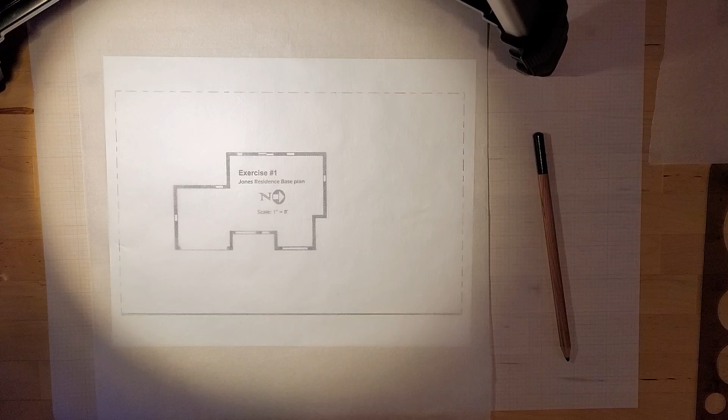I'm going to do a quick video for you about tools because tools can be somewhat confusing initially.

You should have gotten in your packet some 8 scale vellum. Each of the larger squares you see here equals 1 inch, and with this type of vellum, 1 inch equals 8 feet, hence the name 8 scale. That means each of the 8 little boxes inside the larger boxes equals 1 foot on your drawing, which makes it really easy when it comes to measuring.

Speaking about measuring, there are basically 2 kinds of scales. You got one kind in your packet called an engineering scale, and you can see it says engineering on it here. It is not the scale we're using—it's for larger projects, like a square mile kind of thing. So we're not going to be using that.

We're using an architect scale, and it says here on it, architect scale. You'll see in the pictures that we are primarily looking at 1/8 over here on the side, which means each little mark from 0 to the next mark is 1 foot on your drawing. If you lay it down here, you'll see it actually lines up with the little squares in your vellum. Don't be fooled by these larger numbers at the bottom.

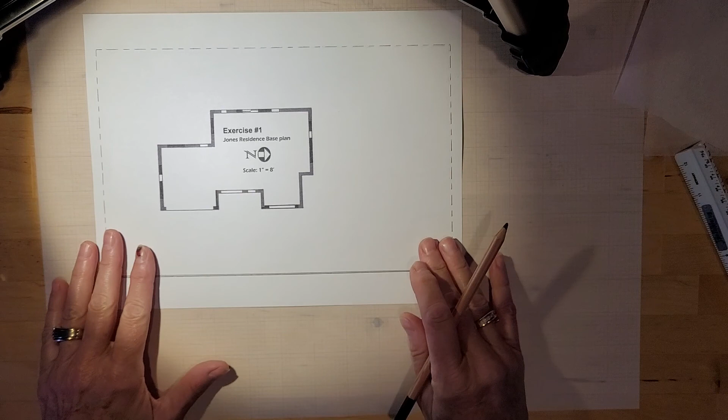Now, how do you use this vellum? I'm going to give you an example. This is the Jones base plan. You all have this—it's on the Google site and it was sent to you in an email.

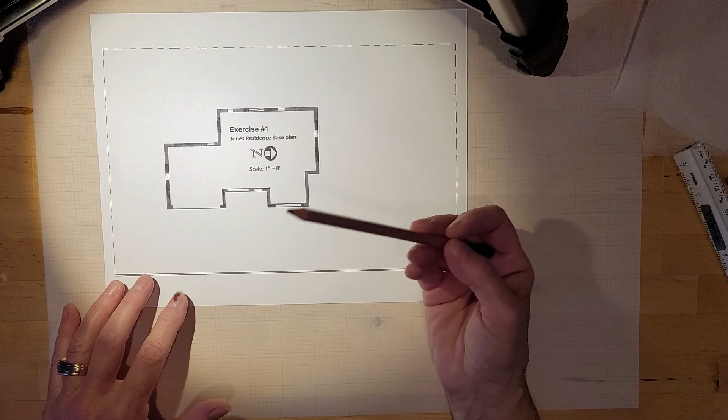You can see that this is the property line, dashed around the edge. This is the curb—the double line is the curb, so this is where the street is out in this area. This is a 1 to 8 scale. Now, this is roughly that—it depends on how it's printed, so it's going to be pretty close, but for our exercises it's going to work out just great. Here you can see the walls are thick, and these little openings are windows.

This is a sliding door, and you'll notice these correspond with the information in the pictures about this plan as well. This is the garage door, front door, front window, and we have a blank slate to work with for the class exercises.

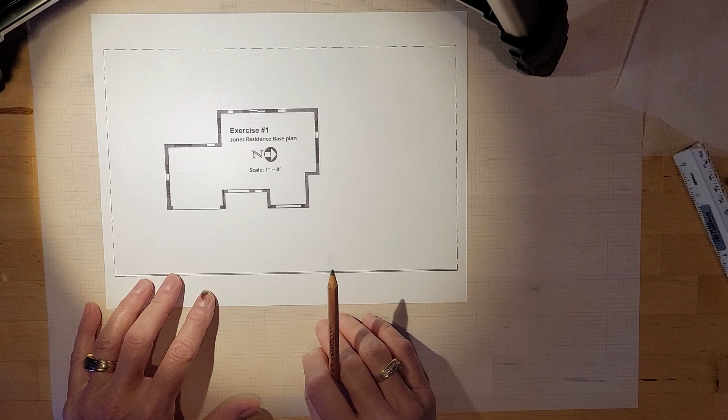Now, how do you do this? How do you use this? When we are going to do a bubble diagram, which is one of your assignments coming up, you can take a piece of tracing paper and lay it over this drawing. I like to usually mark the corners here to correspond.

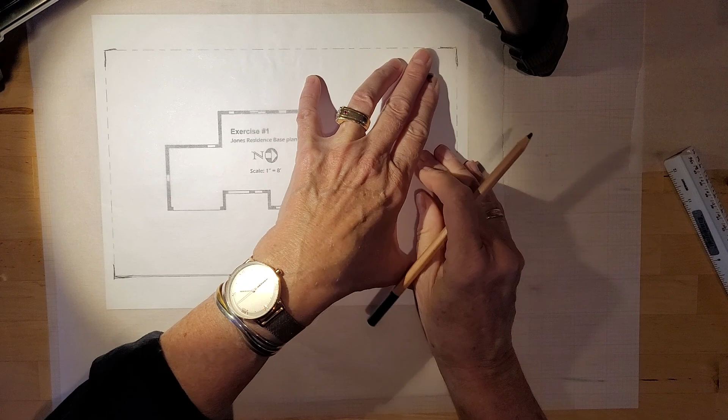Some people will tape down the base plan too. You can tape it to your tabletop, which makes it easy so it doesn't slip. You can roughly draw in even the house, just kind of sketching it in, nothing fancy. That gives you a rough idea when you take this off about what you're working with and how you can line it up.

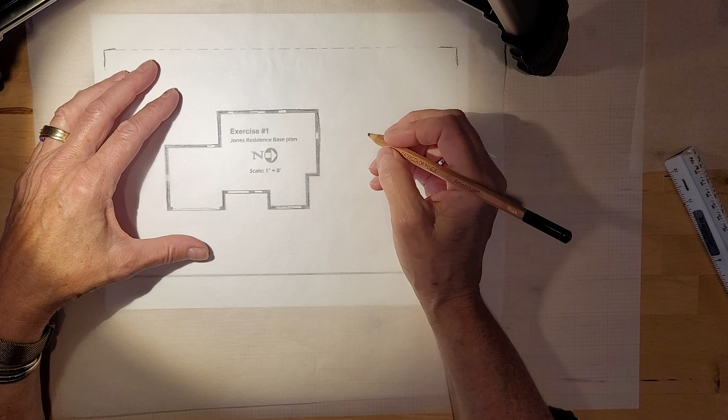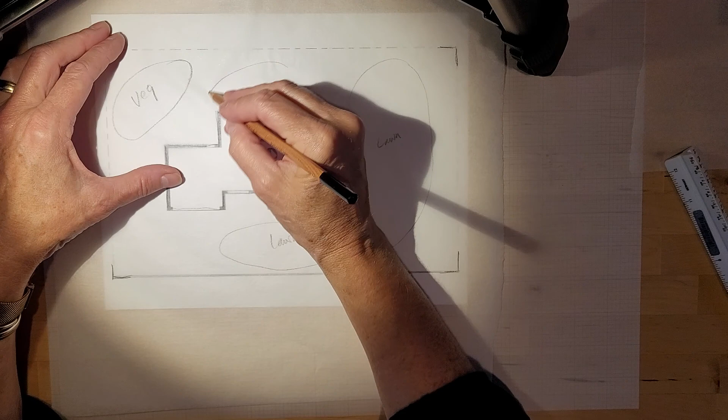Then you can go ahead and start working on bubbles. So an example might be, this is going to be a lawn. I'm going to write lawn in here. Maybe this is also a lawn. They wanted a vegetable garden, I believe, so I'm going to put that back here because this is a southern exposure—here's your north arrow pointing this way, so you know that way is south.

There's your vegetable garden, maybe there's a deck back here, maybe a patio over here. Let's do a foundation planting right here, and so forth. This would be, don't forget the driveway—this is the driveway. You can see the bubbles are nothing gorgeous, nothing artistic, just kind of rough ideas.

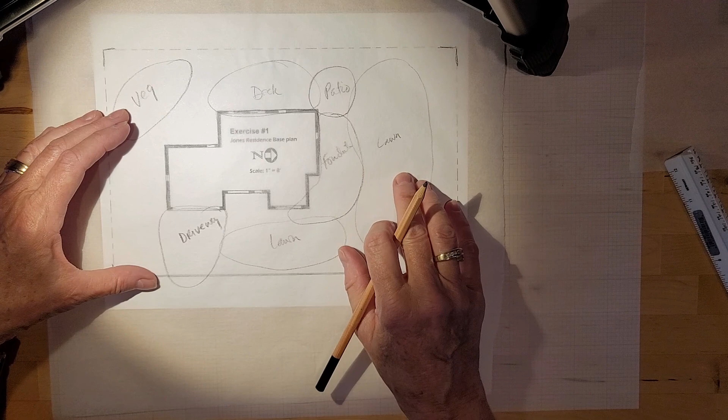What it helps you do is visualize how this plan is going to look, how this yard and landscape is going to function.

The nice part about the tracing paper is, let's say you kind of like what you've got here, but you want to take some of the good stuff and put it onto another bubble diagram, because we always encourage doing multiple bubble diagrams. Now you can see, I can easily see through this, even though I have two sheets of vellum, or two sheets of tracing paper, over this.

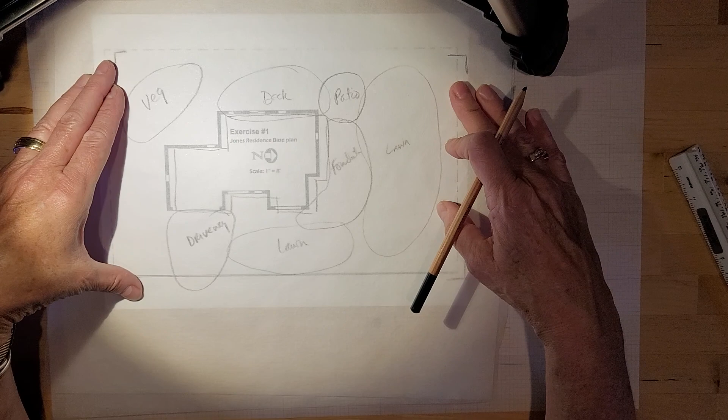Now let's say this has got to have the driveway here, so there's my driveway. But I want to put the vegetable garden over here. Again, you should put your marks on the corners like I did too. So let's say you say, I want the vegetable garden over here—now you can start to kind of recreate it.

And then we'll put a lawn, maybe the lawn goes like this. You can start experimenting with different kinds of bubbles, and that's how that works.

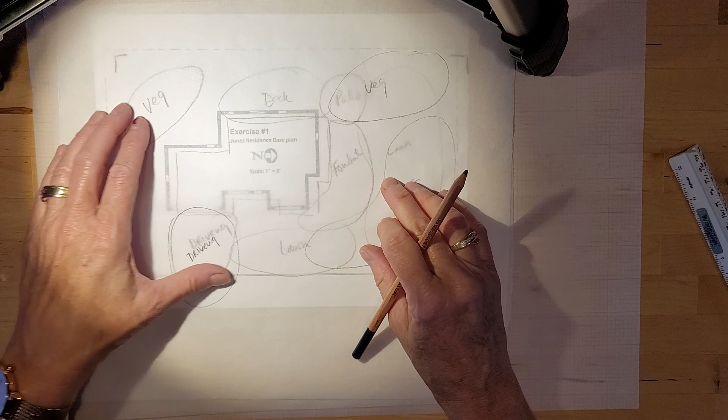So those are your tools that you'll have. Oh, the last thing is you'll have a mechanical pencil—I'm just using an artist pencil—but this is a cool eraser, called a click eraser. If you push this, you can see the eraser comes sticking out the end. This is a nice little tool.

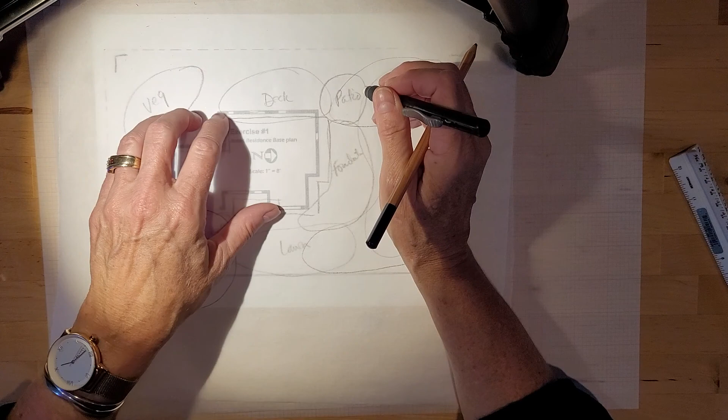It's really good for fine lines. You can get it in there, pop mine out a little more, and it works really well. It's a pretty cool little eraser. It does have crumbs on it, so you'll have to brush those away, but that is essentially how that works.